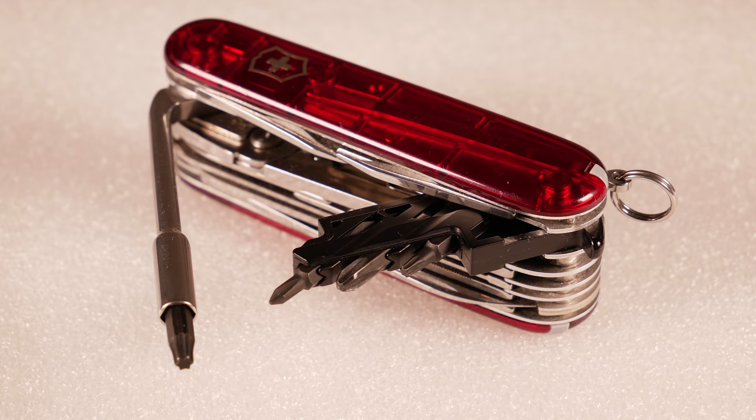This is the pocket knife that I carry with me every day, the Victorinox Cyber Tool, a fine piece of Swiss engineering. And what I like about this pocket knife is that it has tool bits that you can use with it - 4mm tool bits.

So this is the default bit set that comes with the Victorinox Cyber Tool. And although these bits are nice, the ones that I have have Torx ends, and I don't use them that much.

However, if they would be hex ball heads, then I'm quite sure that I would use those bits every single day. So I have been looking around to find bits with hex ball heads, but I'm quite sure that those do not exist. Which leaves me only one option.

I need to make those myself. So here's the first bit that I designed in Fusion 360.

This bit can be used for socket head cap screws with sizes M3 on this side and M4 on that side. The dimensions of this bit are: the shank is 4mm, the small ball here is 2.5mm, and the larger ball here is 3mm.

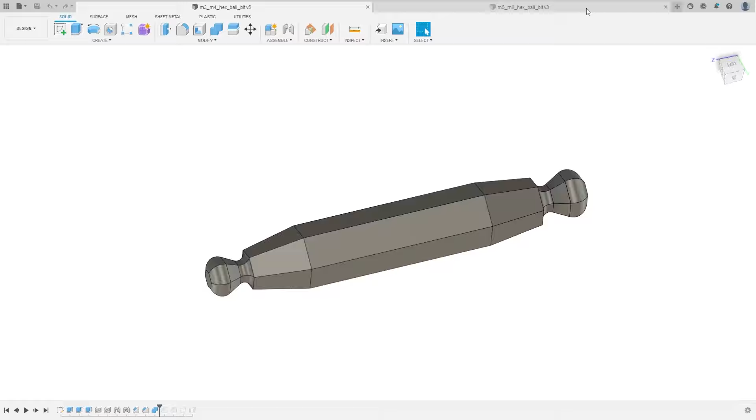Then the second bit that I designed is also for socket head cap screws, of sizes M5 on this side and M6 on this side.

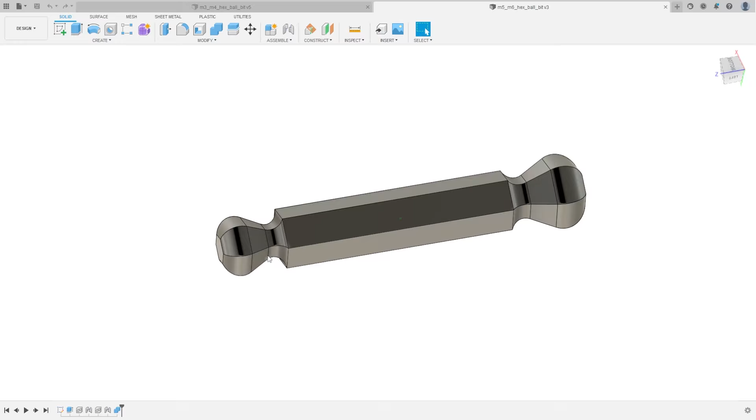So for these dimensions, the shank is of course also 4mm to fit in my pocket knife. And then on this side the ball is also 4mm, so same diameter as the shank, and on the other side the ball is 5mm.

So now that I have designed the tool bits that I would like to have for my pocket knife, I need to make them. But making these tool bits is not easy, especially because these tool bits need to be made from a very hard steel.

Because if you were to make them from a soft steel, they would wear out way too fast. And machining hard steels, especially in the home shop, is not an easy thing to do.

Luckily, however, I have built my own wire electrical discharge machine. Now, if you do not know what wire EDM is, or EDM in general - basically EDM uses the power of electrical arcs to erode away metal. And this allows you to machine or cut any kind of metal with any kind of hardness with very high precision.

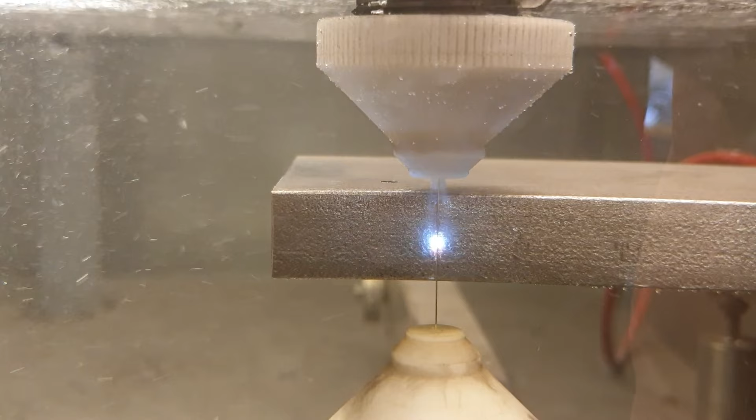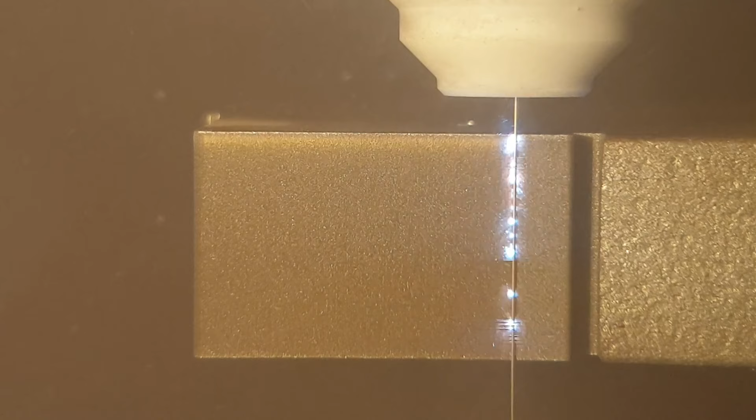This is a wire EDM machine and it uses a wire to cut through the workpiece. This machine can make two-dimensional cuts in the XY plane, and cutting hardened steels on this machine is super easy.

So logically I would like to use my own wire EDM machine to make the tool bits that I would like to have for my pocket knife.

However, this machine can only cut in the XY plane, and the tool bits are round. So currently this machine does not have the capability to machine the tool bits that I would like to have.

So I would like to make an add-on for this machine, an additional axis that would allow me to machine round parts, but only when I need to.

So I would like to have an add-on that I can just place into the machine whenever I need to make a round part, and then when I would like to make a normal flat part again, I can take the rotary axis out.

So that's what I will be designing, building and using to cut the tool bits that I would like to have. So here's the CAD design of the rotary EDM axis that I came up with.

So this whole assembly bolts to the work surface of my wire EDM machine.

Here it is depicted inside my wire EDM machine. This is the window that I use to make YouTube videos through.

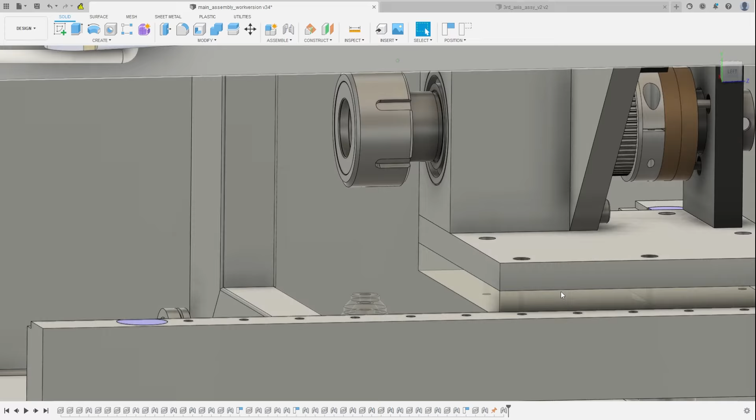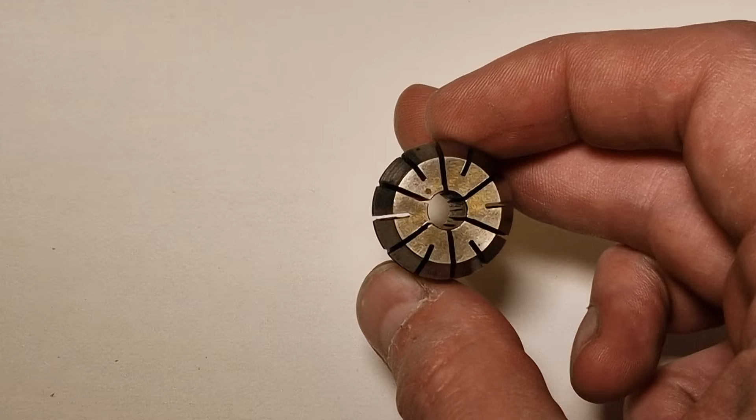So you can see here is the spindle, and this is an ER25 collet chuck spindle. It receives the standard collets that I can use to clamp my work. And the upper nozzle, the upper wire guide here clears the collet chuck.

So yeah, you can use this assembly to realize a rotating axis to wire EDM round parts.

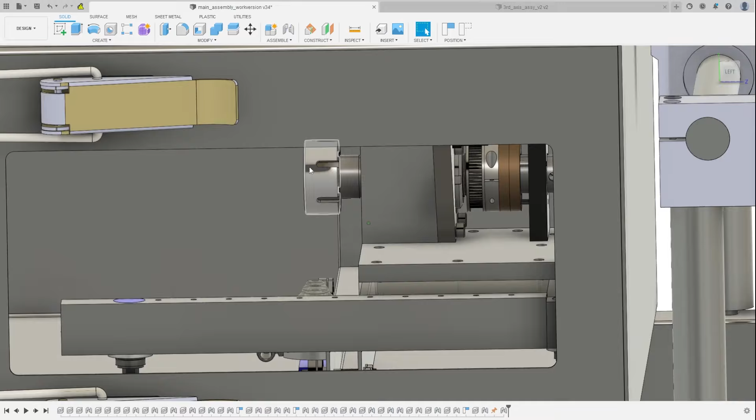Now this design was actually not my first design. I made a couple of iterations. I will elaborate on the earlier versions in a minute.

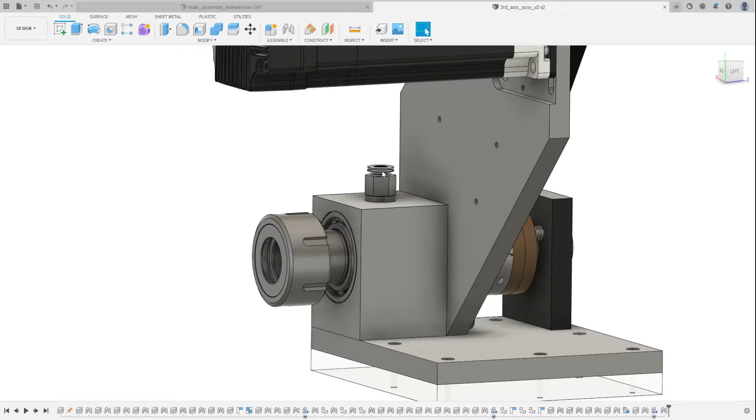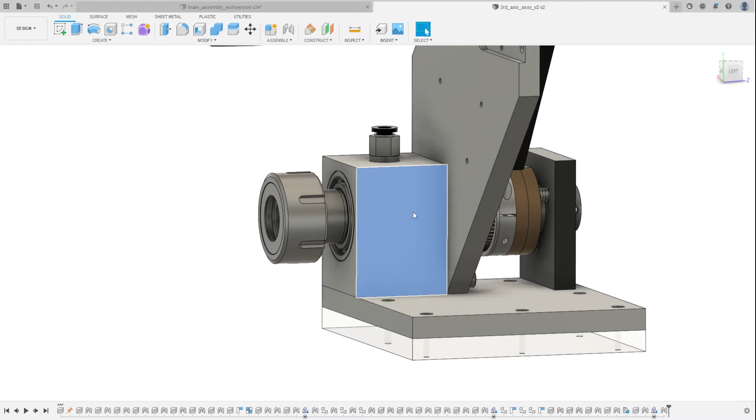So what makes this design a bit special, some special features in this design is, for instance, this water connection. The bearings inside this bearing block are not sealed from the water environment. These are full ceramic bearings. And in order to make sure that the dirty water, which is polluted by metal particles, doesn't get into the bearings, the bearing block is under positive pressure by clean water. So the bearings are continuously flushed.

Another feature is that the frame, so this part and this part and this part, those are electrically isolated from the work table, which the isolation is made by this layer of plastic.

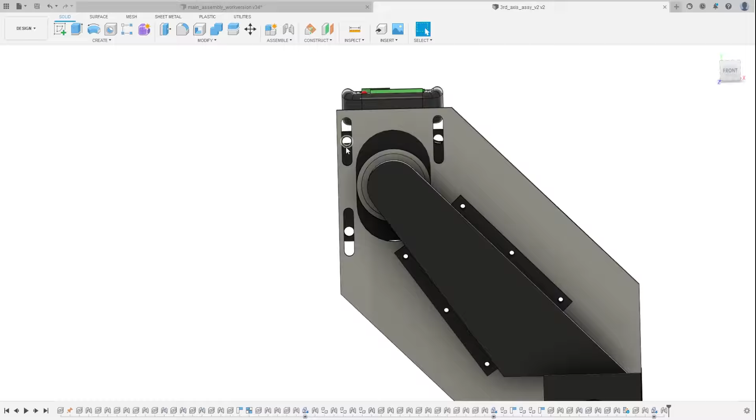And the motor is also isolated from this plate. There's an isolation disc here, which is 3D printed, and the fasteners are not drawn in this CAD model, but the fasteners are also shrouded in plastic to make sure that there is electrical isolation between the motor and this plate.

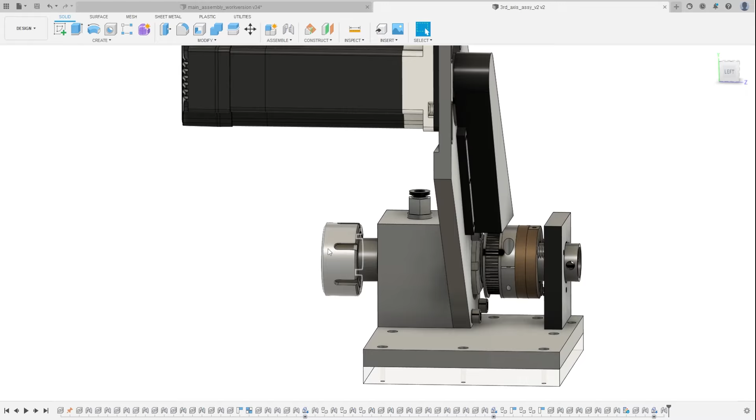Because everything is electrically isolated, apart from the main axis, which should be connected to the work table, because the shaft transfers the EDM current, everything else should be electrically isolated to make sure that it does not get eroded.

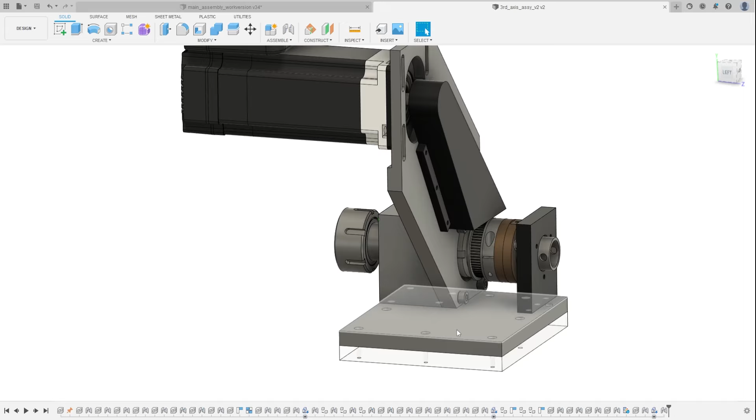So these parts are all made from aluminum. It would be best to make these from stainless steel, but then it gets kind of expensive and it's harder to make. So I made those parts from aluminum and made sure that the aluminum got a heavy anodization.

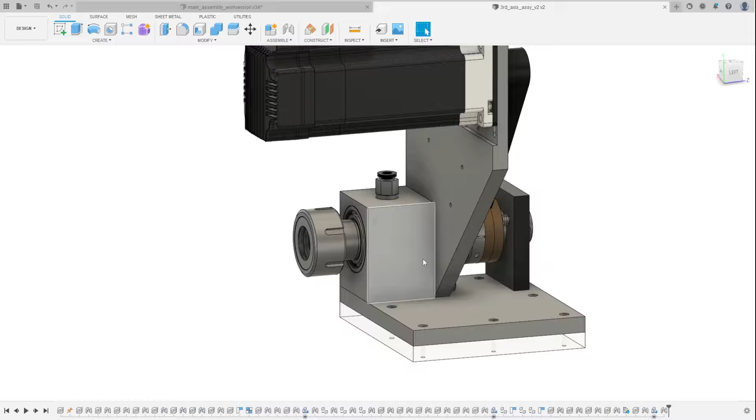Then they last long, but they only last long if they have an electric potential which is floating and not connected to the positive or negative EDM output terminals, because then even if the aluminum is anodized, the aluminum will get eaten away. So these are all isolated and the motor is isolated, and the shaft is basically the only part that's connected to the work table.

Now I had some previous iterations which didn't work out. Let's have a look at those and the problems that I encountered.

So for my initial design, I wanted to make use of standard steel bearings because they are cheap and readily available. Now the problem with using steel bearings is that if you have EDM current flowing from the inside ring to the outside ring, the bearing will be ruined in a couple of minutes, because the EDM current will actually EDM the balls inside.

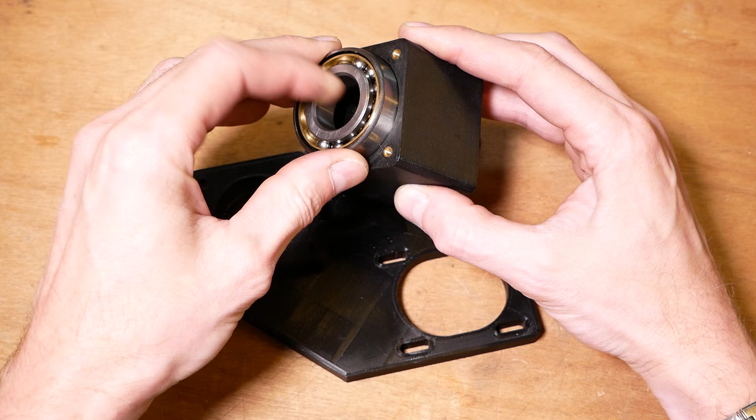So in order to prevent that current from flowing from the inside to the outside, I decided to use a bearing block that's made of plastic. Then the outside ring is isolated and currents cannot flow. So that seemed like a good approach.

However, this whole thing needs to run underwater, and steel bearings do not like water, they will rust really fast. Which means that you need to seal the bearings from the water environment. So I designed in these seals to keep the water out, and then the whole bearing block could be oil filled to keep the bearings running smoothly.

Now I had a lot of problems with that. First of all, the oil kept leaking out. I even applied a thin layer of silicone to the inside of my parts, but the oil kept leaking out, so oil leakage was a problem.

And the second problem was that these standard seals, they actually provide a lot of friction to the shaft. So much actually that my servo would overheat just spinning the shaft in these seals at a few hundred RPM. So there was a lot of heat getting generated in the seals, and the oil was leaking out, so I didn't like that.

And another problem was that although I have a really nice 3D printer, FDM printing these parts wasn't really accurate enough to make the bearings run smoothly. Because after mounting a bearing on this side and on this side, once I started giving these bearings some pre-tension, they weren't running nicely anymore because there was a slight misalignment between the two sides because of a printing error. I tried to correct for that, but eventually this was just giving me way too much problems, and I decided to ditch the concept of making a plastic body.

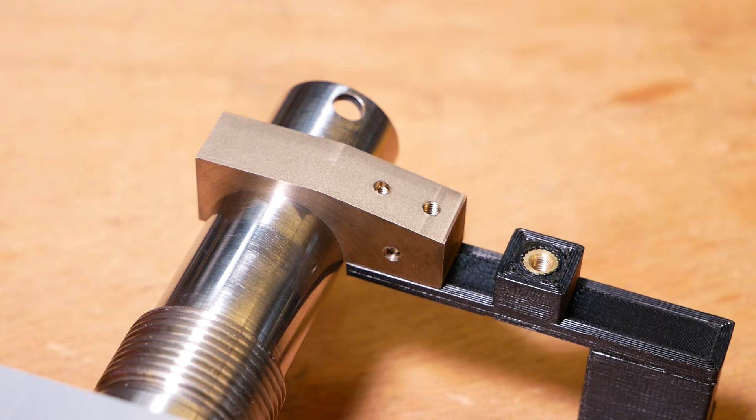So this is the first idea I came up with in order to transfer current from a fixed world to a rotating world. Here we have a bronze contact which wraps around the axis with a half moon shape. I wire EDM this part, and it's connected to the fixed world through this 3D printed part. This fixed world contact is electrically isolated and pressed onto the shaft, and then the shaft can rotate while the contact stays put. That's what transfers the current from a fixed world to a rotating world.

This was the initial idea I had, and I immediately made it. After I had made it, I came to the realization that it had some downsides, which is why I eventually chose a different concept.

There are two things wrong with this concept. First, although this is soft bronze and this is stainless steel, the stainless steel will wear, not just because of friction but also because of the quite large currents running through this part. This stainless steel shaft is not easy to make, and I don't want to wear it. So there's a problem here: if any parts wear in the concept, they should be cheap to make and easy to replace. Clearly this concept lacks in that sense.

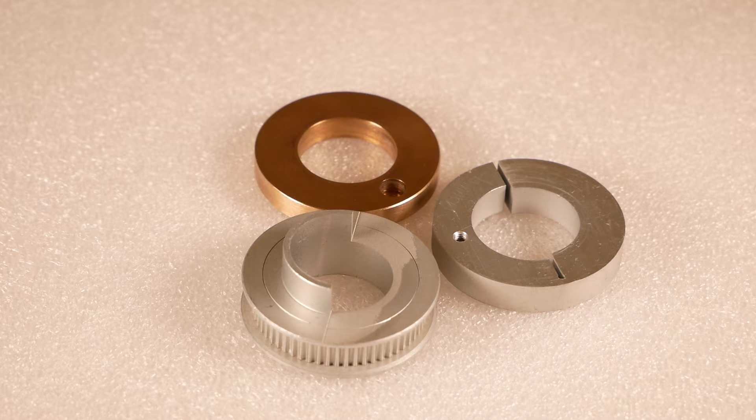Okay, let's have a look at some of the parts I made. Instead of a radial loaded wear contact, I made an axial loaded wear contact, which you see here in the picture, at least the brass part. The brass part is connected to the rotating world. The other two parts here are a clamping ring and the pulley for the belt drive.

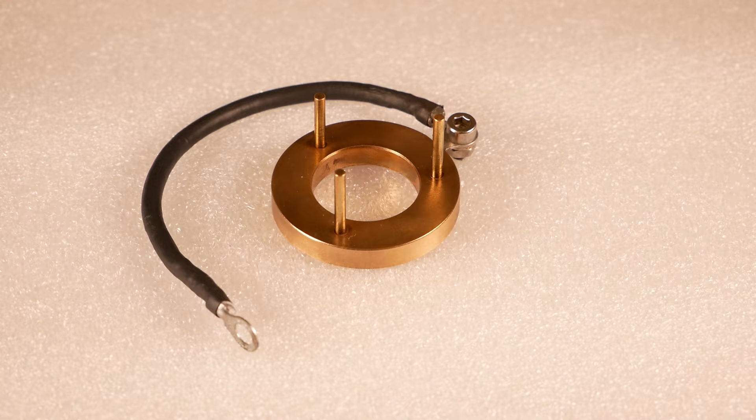This is part of the axially loaded wear contact that is connected to the fixed world. It has 3 pins which will hold springs in place, such that this whole assembly is spring loaded and pressed against the other part, which rotates.

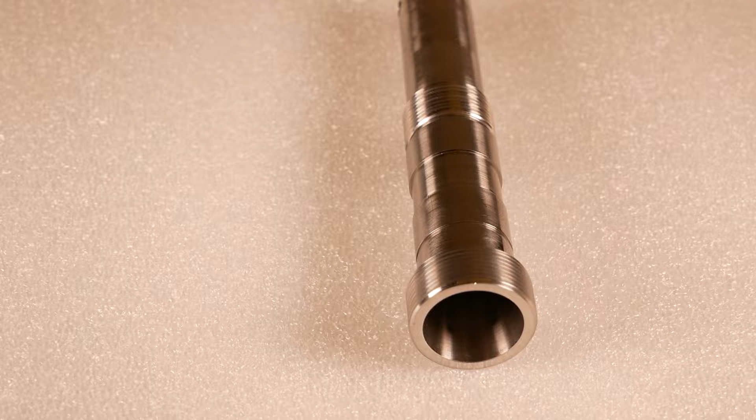This is the ER25 collet spindle that I made from 304 stainless. This is the bearing block with full ceramic bearings. And this is the servo motor that I'm using to drive the spindle.

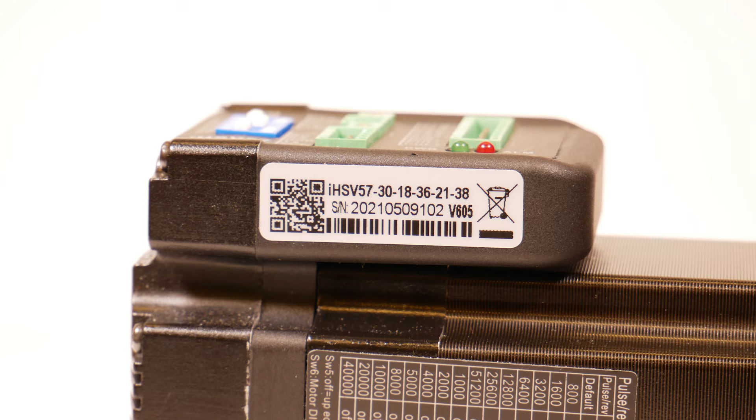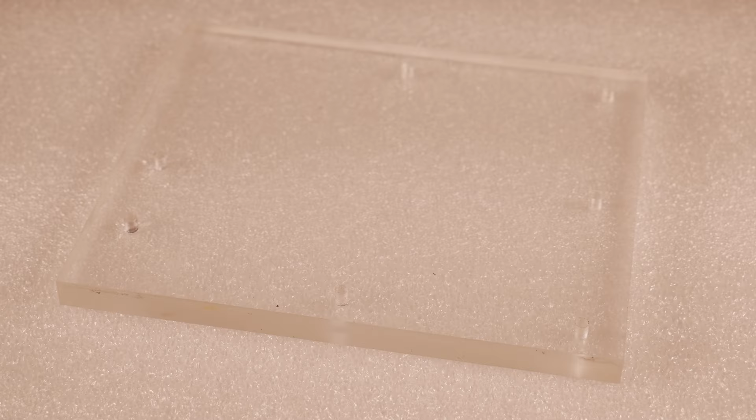This is the base plate, also anodized. And finally the plexiglass isolation layer for isolating the base plate of the work table.

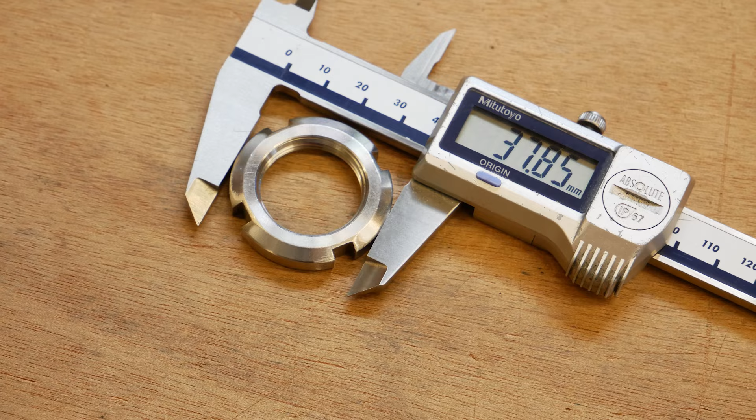So now it's time for a nice montage for the assembly. But for assembly I need a tool, a special spanner for this slotted lock nut that I don't have. It's a special size, so I'm taking a small detour from the rotary EDM and first making the spanners with my wire EDM.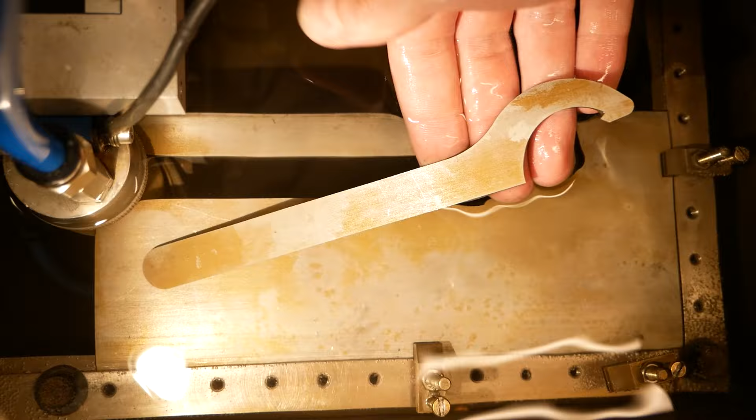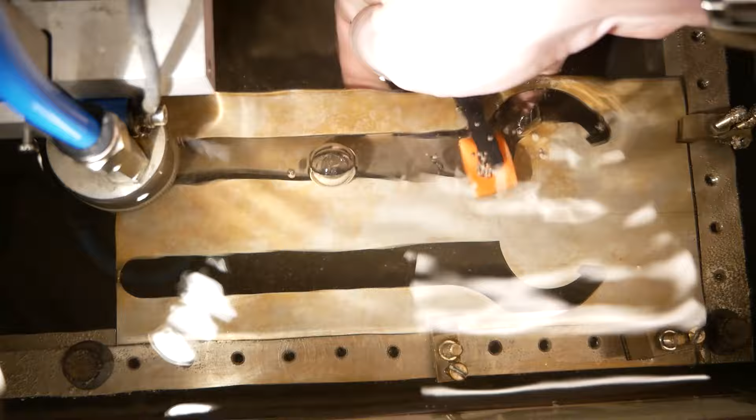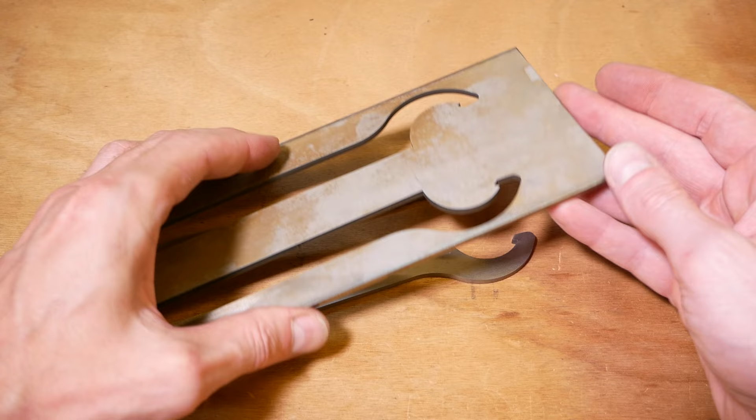So I finished the special sized spanners that I need, and boy, I cannot tell you how convenient it is to have a DIY wire EDM in your shop. Now that I have these, let's start the assembly.

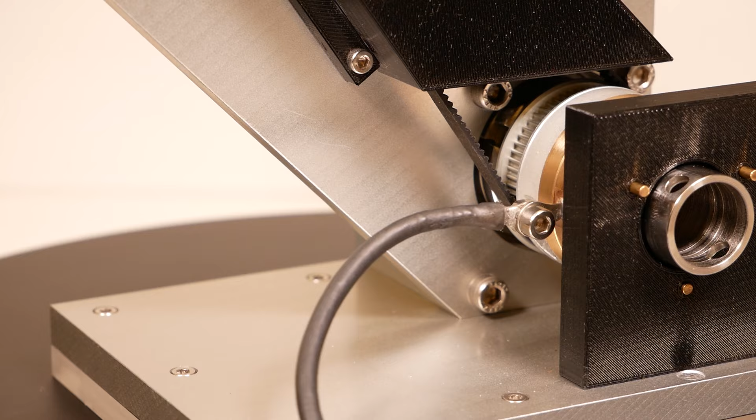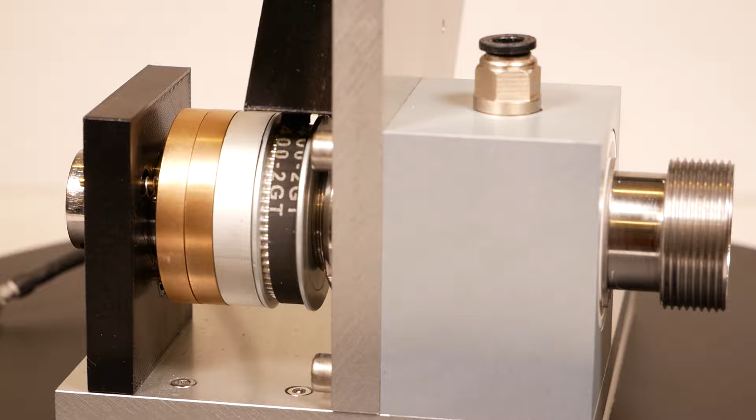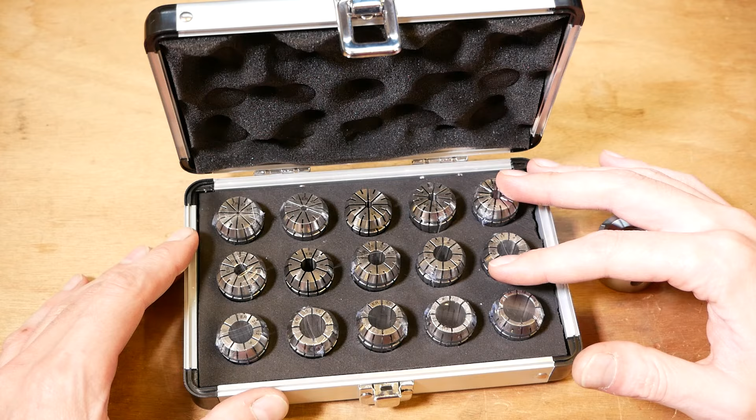So I got this set of ER25 collets, and the set is fairly inexpensive, 80 euros. But actually these are made of standard tool steel, and these will likely corrode very fast in the EDM environment. However, the same set made from stainless steel would be more than 10 times as expensive as this set. So I wanted to give it a shot with this cheap set by trying out bluing this steel and see how long it will hold in an EDM environment.

The same holds for the collet nut. This is not stainless steel, although advertised as stainless steel on AliExpress, but it's magnetic, so it's not stainless. I will try to blue this as well, and then let's see how it will hold in an EDM environment.

So before bluing the parts, they need to be thoroughly degreased. I'm putting them in my ultrasonic cleaner, which contains isopropanol alcohol.

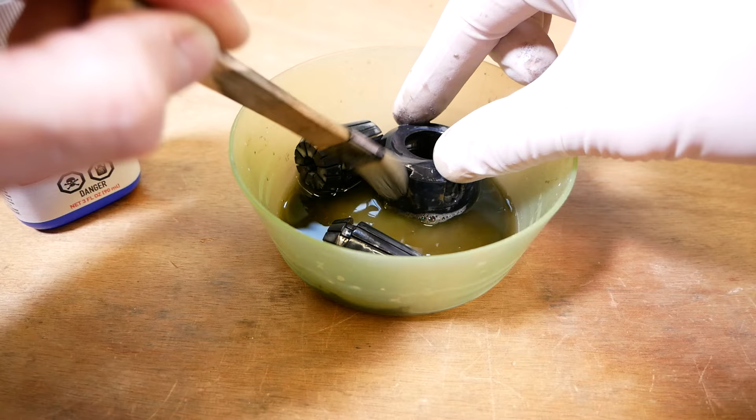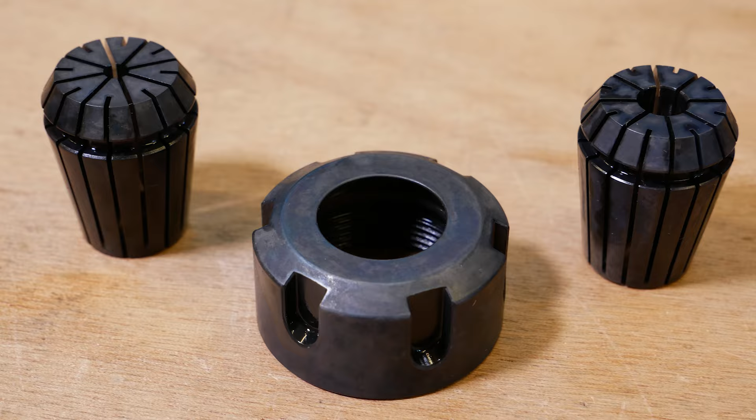So after bluing, I washed them with cold water, then blew them dry with compressed air, and let them rest overnight, not sure if that is necessary. The next day they looked like they could use some WD-40, so I applied that, and this is the final result. Looks nice, but let's see how it holds over time.

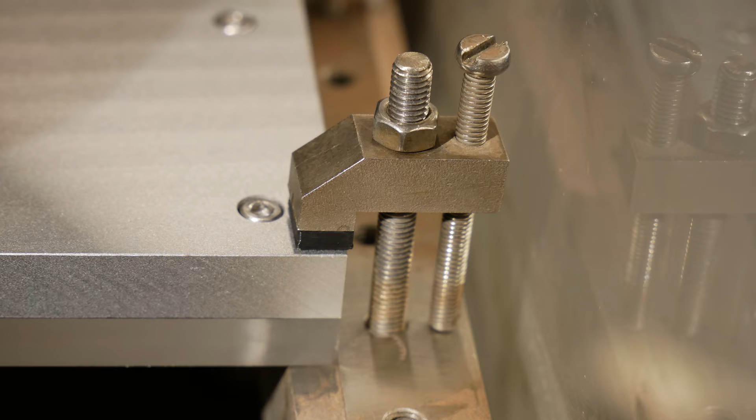Here my wire EDM lathe axis is mounted in my wire EDM machine. It's bolted to the work table with my standard stainless steel clamps, though I had to isolate the clamps by adding a small 3D printed piece of plastic in between, to make sure the anodized aluminum base of the lathe accessory is electrically isolated from the work surface. This prevents corrosion.

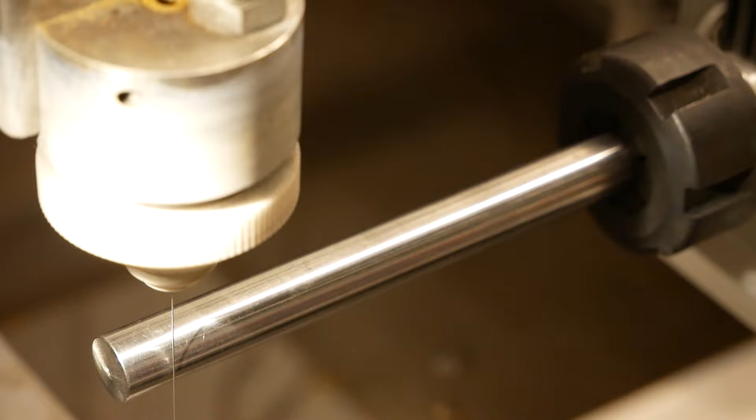Now that my EDM lathe accessory is mounted, its rotary axis is not perfectly aligned with the x-axis of my wire EDM machine. To correct for that, I take two measurements by probing with the wire, spaced apart. Then with a special software tool I wrote, these measurements are used to calculate the transformation required to correct for this misalignment. That transformation is used in the CNC system, and the axes are perfectly aligned by software.

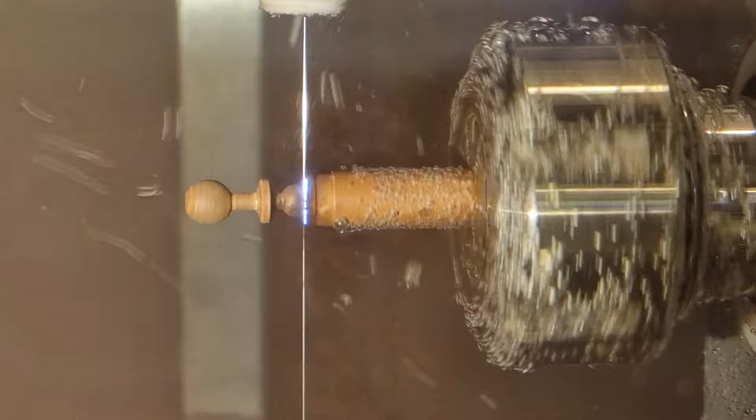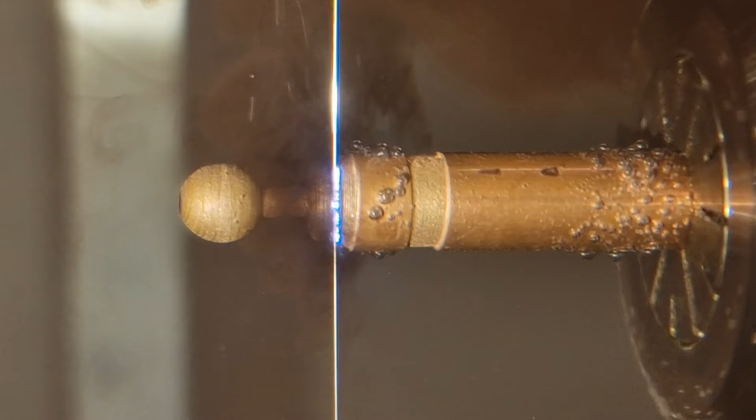Finally, we have the EDM lathe operation in action. I was purposely flushing with a really low pressure to show the nice effect of the material chipping away and creating bubbles. There are some lines wobbling around instead of straight cuts because I was trying all sorts of different parameters and rotational speeds, just to get acquainted with the lathe process for my EDM machine.

Because there are quite a few parameters you can tune to try and make things better, in the end I settled with a rotational speed that was actually a lot lower than I was expecting. This made the servo behavior less nervous, because any slight runout needs to be compensated for by the servo for the y-axis.

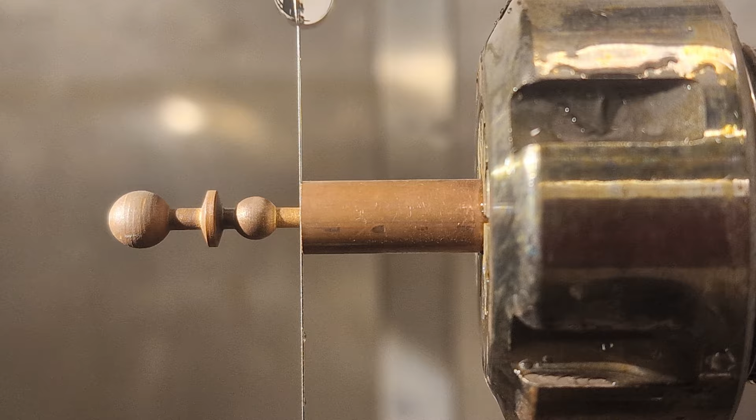But the end result was quite nice. Happy with that result. It was only a test piece, and now I wanted to make something useful, like the tool bits I designed for my pocket knife. So I got two scrapped pieces of metal, one broken tap and one broken mill bit, which are really nice steels, and decided to use those to make my tool bits from. So here we go, let's make some tool bits.

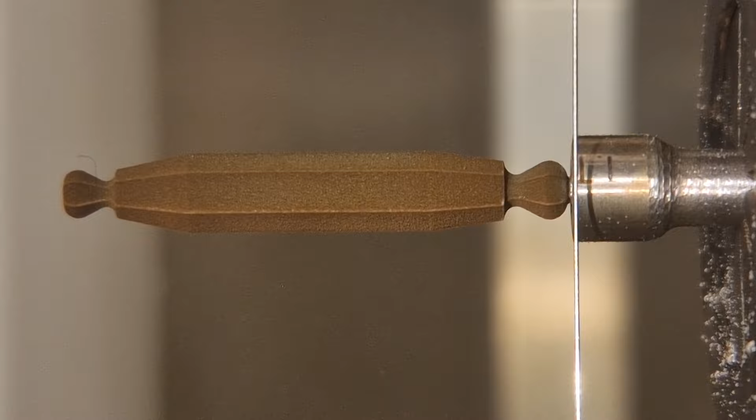And there you have it, my finished M3/M4 hex ball tool bit. As you can see, there are different shades of oxidation. That depends on the length of time that side spent in the EDM process.

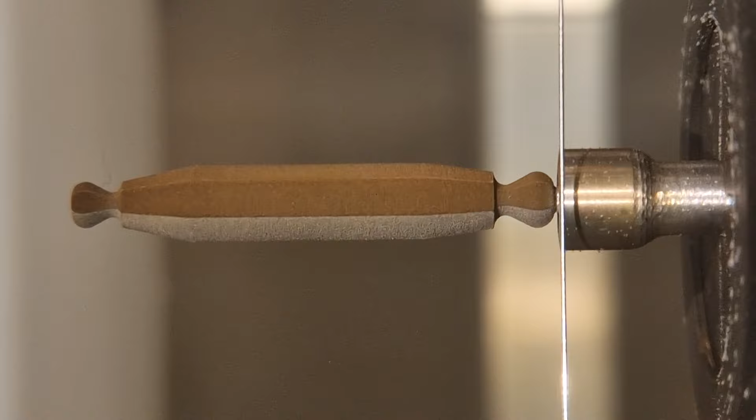And for this part, the final operation is cutting it off. Of course I also made the M5/M6 version of this tool bit. I did not capture that on video because the process was exactly the same. Here I'm cutting it off, and then both tool bits are finished.

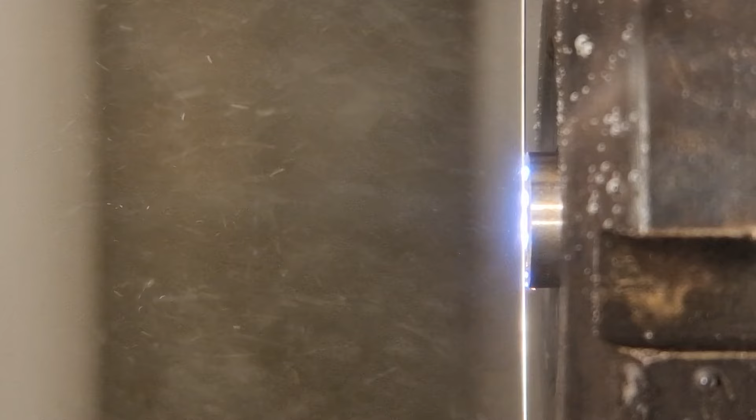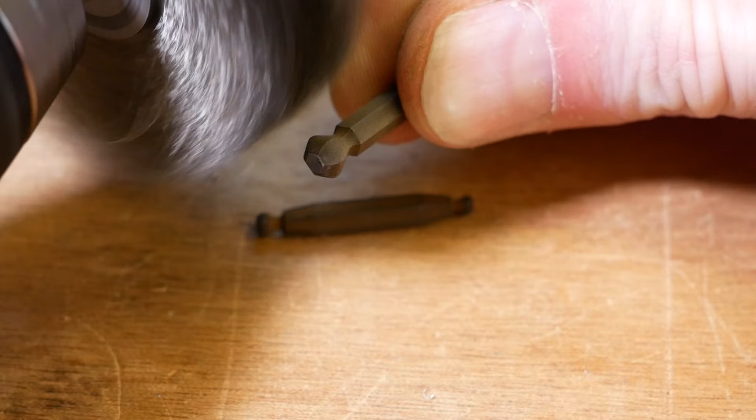Here are the finished tool bits. They look a bit rusted and ugly, but that's only very superficial rust. A quick brush clears that off immediately.

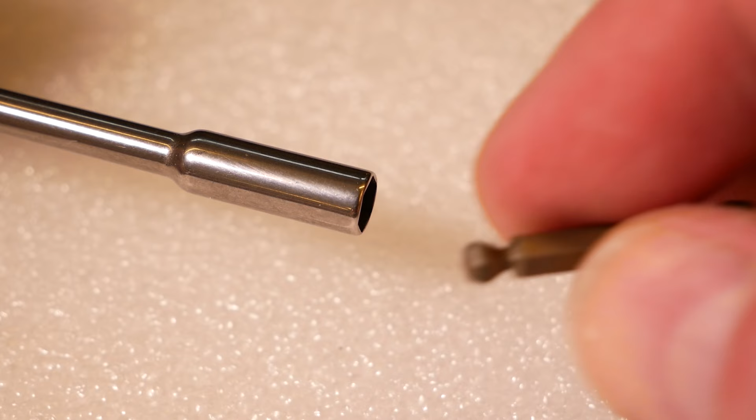And here are the finished bits next to their originals. One small problem I had is that the original bits have ball detents and mine don't. I cannot make ball detents in hardened steel, so my bits would just fall out. To fix that, I glued a very small magnet into the bottom of the holder, and that keeps my bits firmly in place.

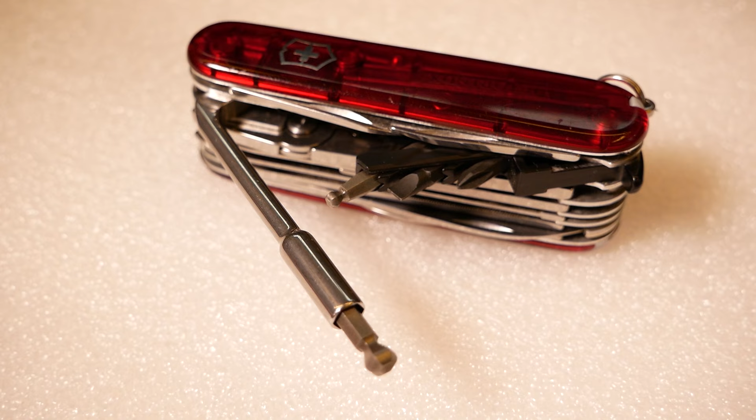Final thing I wanted to share is that after 1 hour of machining, the collet and collet nut did not look corroded. Although 1 hour in EDM time is not that long, it gives confidence that this might be a nice solution. Okay, that almost wraps it up for this video.